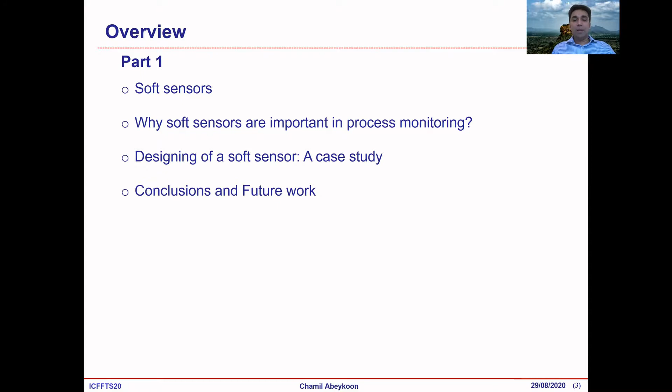For the second part, I would like to talk about fuzzy logic based control and designing a fuzzy logic based control, again with a case study briefly based on the polymer extrusion process, and some conclusions of that work.

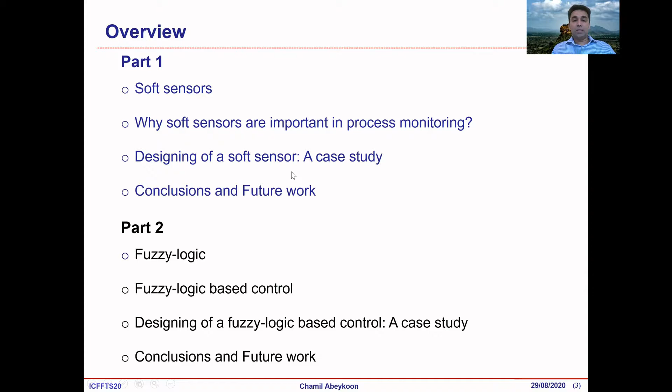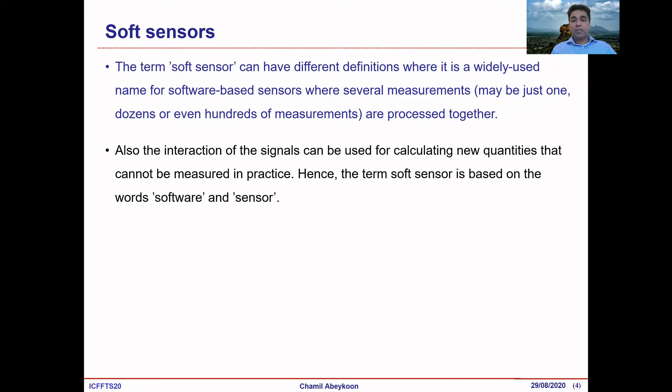A soft sensor can have a number of different meanings, but it mostly relates to a software-based sensor. These sensors could be based on one measurement, or maybe a dozen measurements, or even hundreds of measurements, which we process together. The idea is to process these signals and calculate a new quantity or parameter which cannot normally be measured in practice. Hence the term soft sensor, based on the words 'software' and 'sensor', shortened to 'soft sensor'.

If you ask me to define the term soft sensor, here is the definition I have written: a soft sensor is a technique of estimating process parameters in various applications when a hardware sensor is unavailable or unsuitable for making direct measurements.

So soft sensors are really important to measure or predict process parameters when we cannot use physical sensors due to constraints in the process or environment, or when there is no physical sensor available for a parameter measurement. In such cases, we can use a soft sensor.

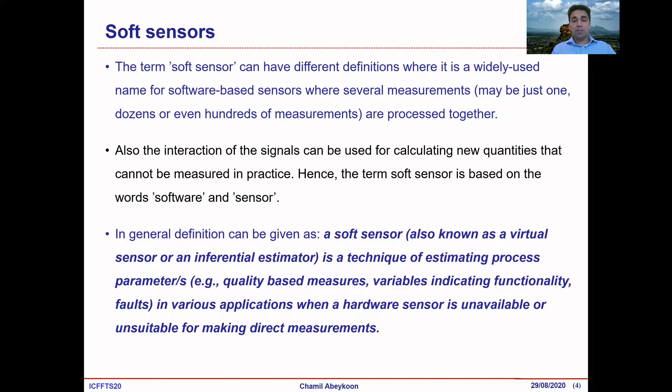Sometimes you will find this known as a virtual sensor, hybrid sensor, or inferential sensor. All of these terms refer to software-based sensors.

So most of these inferential sensors are used in real-time process monitoring, modeling and control, and also sometimes in fault detection and estimation, the process diagnostics. So mostly in continuous processes which operate 24/7. So of course, these processes are running continuously.

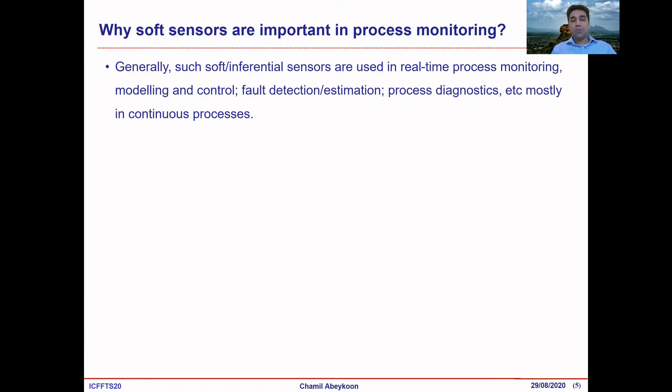So then it is very important to have as many measurements as you can in several locations to observe the process functionality, to observe the process quality, and therefore we need to have some advanced measurements. So then soft sensors can play an important role in these types of occasions, right? If you look at the current industry, soft sensors are already being used. So that is the important thing.

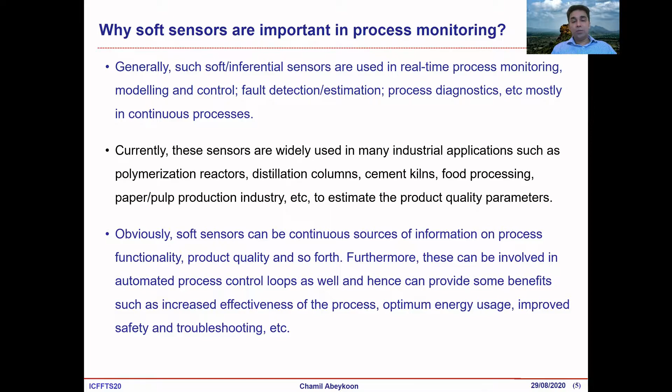This is mainly being used in the chemical industry, polymerization reactors, distillation columns, cement kilns, in the food processing industry and paper pulp production industry, mainly to estimate product quality parameters. Okay, and then these soft sensors can be a continuous source of information for process functionality or product quality, as I mentioned before. And these can be used for process optimization and also for energy optimization and for several other purposes as well. And also, if we can have more measurements which are really useful, then this can be helpful for process control purposes as well.

So in general, if you look at soft sensors, we can categorize them into two types. Model-driven is one type. These are based on first principle models. I hope you know how to develop first principle models based on physics. And the other type of soft sensors could be data-driven. These are mainly based on actual data measured from the processing plants. So you can collect the information in offline modeling or maybe inline modeling, or we call online modeling. So we can use data-driven soft sensors based on the actual data collected from a plant.

Okay, so of these two types, model-driven soft sensors, which are based on first principle models, are mostly used in steady state processes to analyze the physical and chemical background of the process. While the data-driven soft sensors can represent the process dynamics quite well compared to model-driven soft sensors, because data-driven soft sensors are based on real process data instead of physical or first principle models. So therefore, data-driven soft sensors are popular, but it is quite challenging to develop them sometimes.

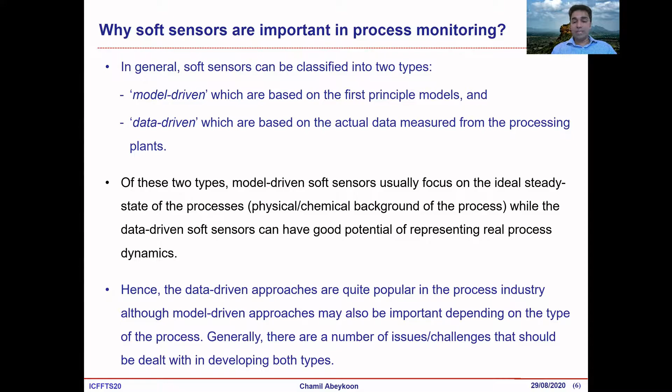Okay, and there are a number of challenges, issues or limitations attached to the development of soft sensors of both types, model-driven or data-driven. So there could be some limitations in developing these soft sensors or virtual sensors. Right. So in this talk I'm going to focus on data-driven soft sensors. I'm going to look briefly at how we can design a soft sensor. The design process can be classified into a few different stages.

So the first stage is the data collection process. Here I'm going to look at the required essential tasks, and also maybe optional tasks in developing a soft sensor. The first one is data collection. If you look at a data-driven soft sensor, we should have a very good set of data. So then we can use data acquisition devices and a set of sensors, and then process investigation procedures to collect a good set of data. When we are going to design system identification experiments to collect the data set, you should know which parameters you're going to predict, and therefore which sensors you should be using.

And here some things to be considered: the accuracy or the quality of sensing devices and data acquisition units. It is quite a well-known factor. You should have some idea about how quickly your process is changing. When you select a sensor, that sensor should be updating quickly enough to capture all the process dynamics. So therefore, selecting the sensors and also data acquisition devices should be compatible with the speed of your process. Otherwise, these devices might not be able to capture all the process dynamics fast enough. So the sensor that you're going to develop might not be able to represent your process properly.

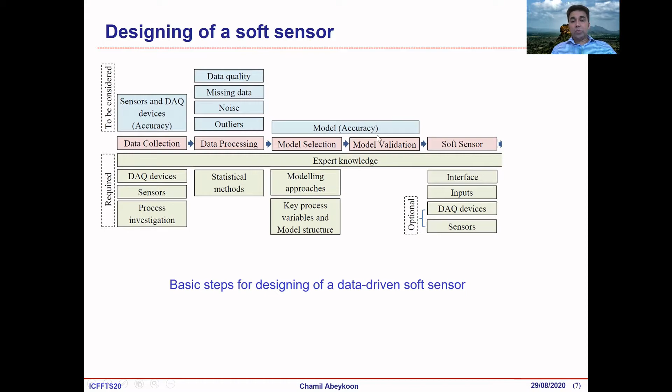So the model validation, or the model testing and training, should be done in proper ways. That is also important to make sure that your model is doing well. So once you have data collection, data processing, and then you develop the models and validate the model properly, then you can implement the soft sensor. So ideally, the soft sensor will have a set of inputs based on some real-time measurements from your process, and then we have the interface or the algorithm, your model, in a soft platform, and once you provide the input to the soft platform, it will predict the parameter that you need.

You can develop this model offline, or most probably if it is a continuous process, it would be better to develop online modeling. So then you provide the input to your model, and it automatically predicts the output based on the algorithm or the model that you have in the soft platform. So once you implement the soft sensor, it's important to think about the interface and inputs, and also the data acquisition devices and sensors that you're going to use. So those are important things to be considered.

And then one of the other important parameters is when you collect the data set, you should make sure to run your process within the whole operating envelope.

So if you don't run the process within your whole operating envelope, what will happen? Let's say you record the data of your process at the first stage between 0 to 50 RPM, but your process is normally running above 50 RPM, and you use a soft sensor to predict some parameter. When you run the process above 50 RPM, your soft sensor might not be able to predict the required parameter accurately enough, because you have not collected the data within that range.

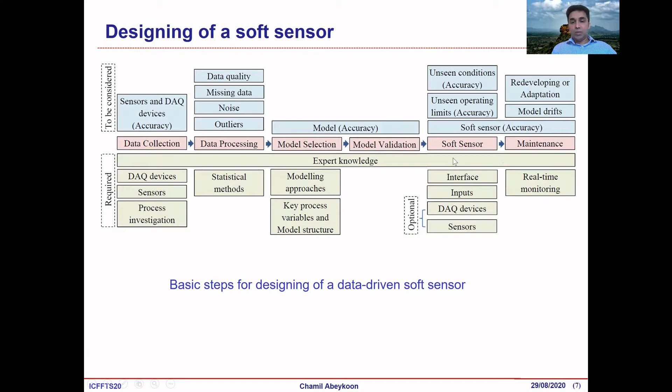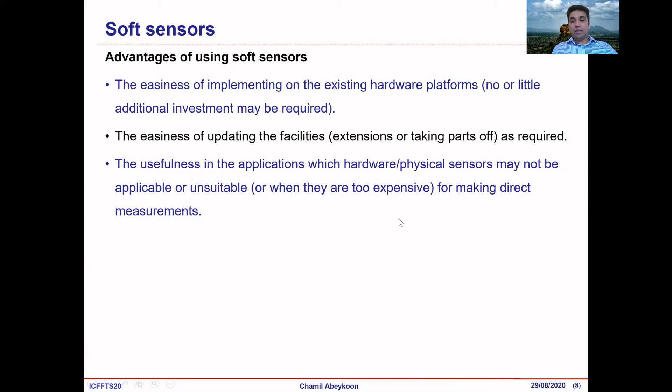So then the advantages: there are several advantages of using soft sensors. We can implement them using the existing hardware platforms, and it's easy to update because it's a soft platform, so you can update the model without any problem if you have new models developed. And, as I said, we can use them when hardware sensors are not suitable or not available.

And real-time estimations can be done without any time delays. Let's say you are taking measurements and your sensor is far away; it could introduce some delays between the interface or control panel and the sensor. But soft sensors can be implemented by considering those time delays. And possible ease and simplicity of maintenance, but I would say it could be complicated depending on your process and how complex it is.

Right, and also it could be low cost. Again, it's something you have to consider. Let's say you want to use a thermal imager to analyze some parameter; it could cost maybe $3,000, but you might design a soft sensor to get the same thing using some reasonably good sensors available in the market for $1,000. So it's your choice which one is more suitable.

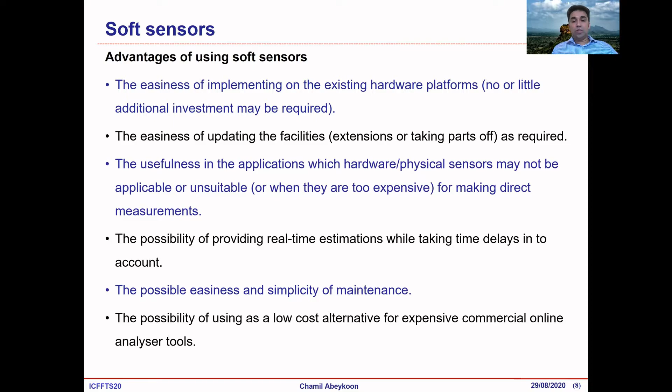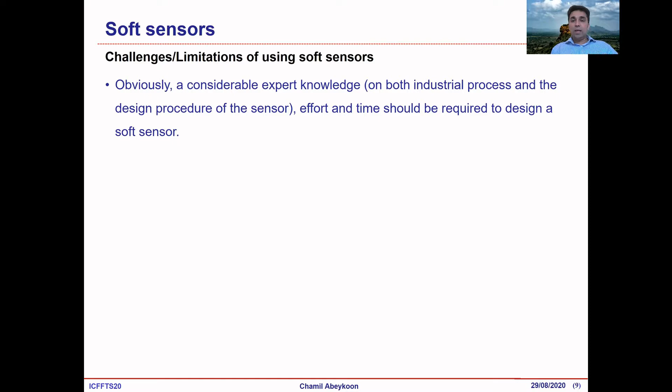And then challenges and limitations. Obviously, expert knowledge is one key thing. The person who is going to develop a soft sensor should have knowledge of the process itself. Let's say you're developing a soft sensor for a polymer extrusion process. That person should have a good idea about how the process works, what the parameters are, and what the possible instabilities are. At the same time, they should have good knowledge of data processing, modeling, and developing algorithms. So expert knowledge is really important in developing soft sensors.

Also, the performance of a soft sensor depends on the training and validation data sets, so the quality of the data is important. Sometimes it might be difficult to get a good set of data using available cheap sensors. And data-driven soft sensors might be specific to a given condition. For example, let's say you run the process for one particular die geometry and for a certain set of speeds.

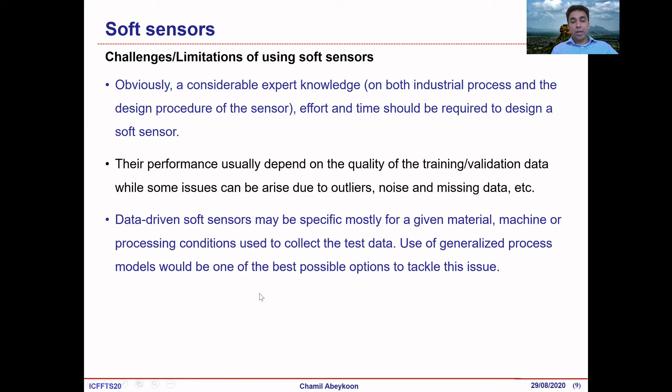So then if you develop a soft sensor based on that set of data, it could be good only within that range. If you run the process outside that range, your soft sensor might not capture those dynamics. So therefore, it is important to look at the whole operating window when you develop soft sensors. And the other thing, maybe one of the solutions would be to develop some generalized models to cover the overall processing behaviors if you can.

Right. So from here onward, I'm going to look at a brief case study of developing a die melt temperature profile predictive soft sensor for the polymer extrusion process. If you don't know the extruder, this is a basic arrangement and how it works. Here we feed in some solid polymers, and they are driven through by the extruder screw while absorbing the heat.

The heat can be provided externally, and also the heat can be generated internally via friction and viscous dissipation. So at the end, we should have a molten polymer which is thermally homogeneous. If this is a circular cross section, throughout the cross section we would like to have a certain temperature, let's say 200 degrees, and then this melt can be pressed into the die to get the desired shape.

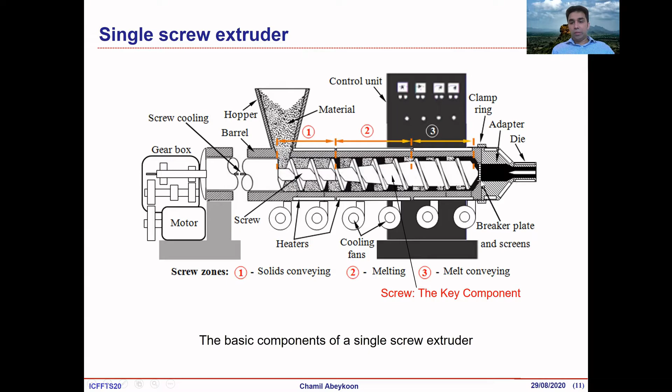If we don't get a high quality melt which is thermally homogeneous, then there could be problems in the product. I'm not going to discuss more about the extrusion process; we are going to look at the melt quality at this end. Then what is the motivation for this work? A while ago we were looking at the thermal efficiency and specific energy consumption of extrusion processes, and we realized the thermal fluctuations across the melt flow cross section matter. Let's say it's a 38 millimeter die.

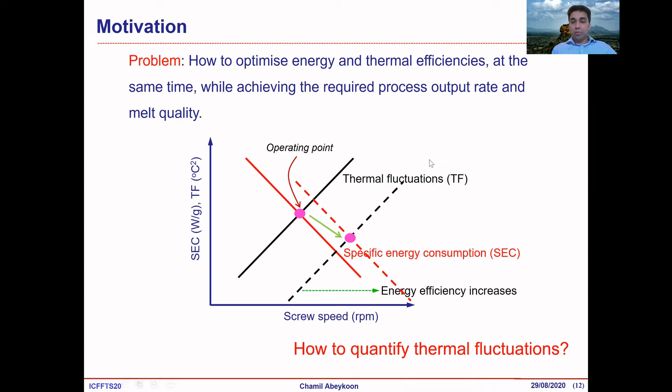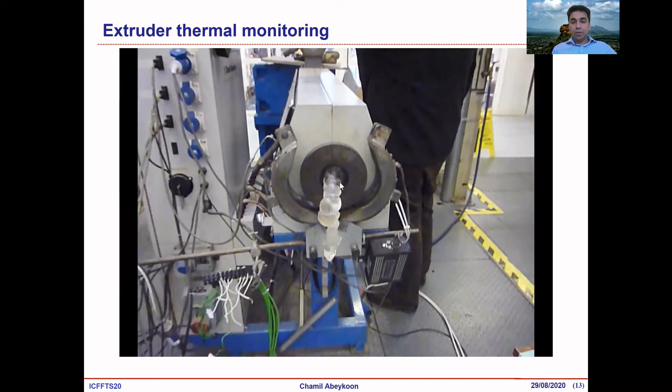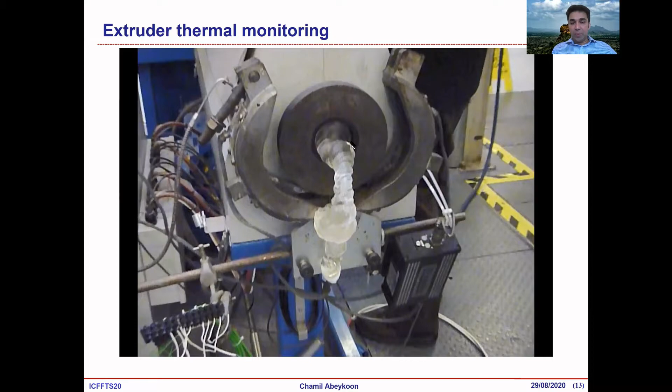If you look at the process here, I'll show you a short video. This is how you will find the output of an extruder. You can see it's a highly viscous melt. If you place a sensor across this to measure the temperature cross section, it's going to be really challenging. The sensor should be really robust, so it's not easy to make a measurement using a physical sensor across that output.

So this is the output of the extruder, and we wanted to check the temperature variation across this cross section. Those are the motivations. We wanted to develop a model to predict the temperature profile at this location. So what we did, we wanted to measure it experimentally, and then we checked the available sensors. I'll come to that in a minute.

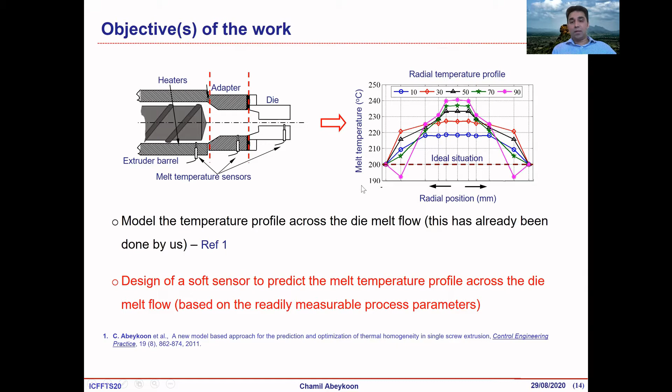So then we wanted to develop a model to predict this melt temperature profile, and by having that model, we wanted to develop a soft sensor. That is what our target was in this study. Ideally, if you set 200 degrees here, we need to have 200 degrees across the melt flow cross section, but we can't get that. This is actual results.

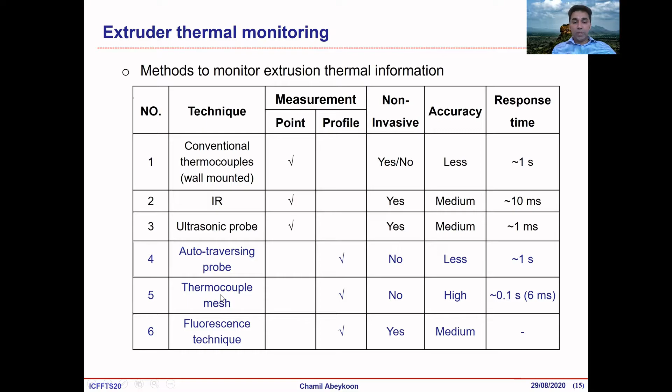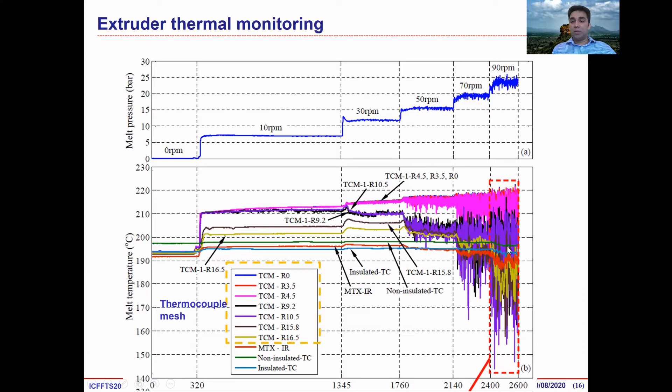The insulated thermocouple is the blue one. You could see it shows a really flat temperature profile, so it's not good enough. The non-insulated thermocouple is even worse maybe, the green one. They are indicating really stable melt temperature, but actual temperature fluctuations are really huge. These infrared sensors and wall-mounted thermocouples shown in green, red and blue are the most commonly used in industry. So the industry is getting stable signals, but actual thermal fluctuations are really huge, especially at high speeds.

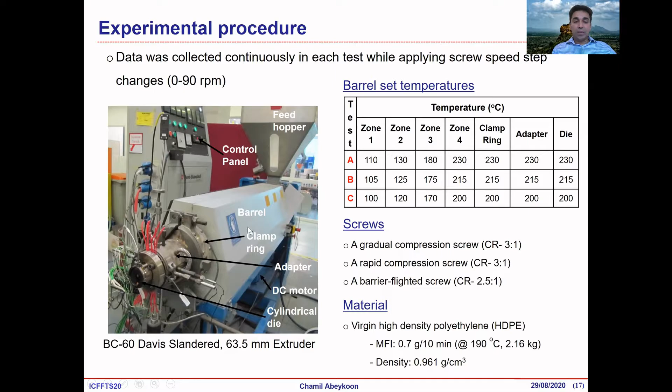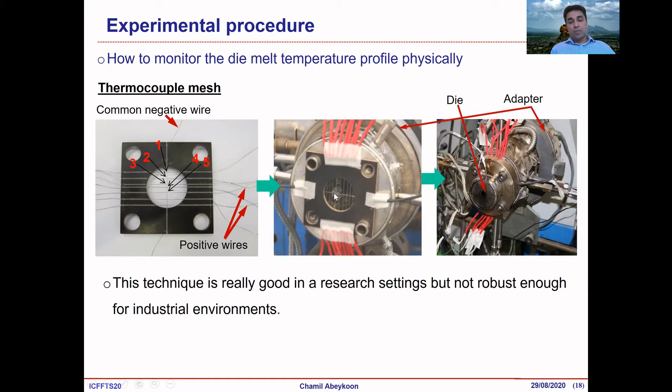But this is really fragile. You can see tiny wires here, so they can be easily broken, and it is disturbing the melt flow and also adds some shear heating effect. Therefore, this is not viable in industry.

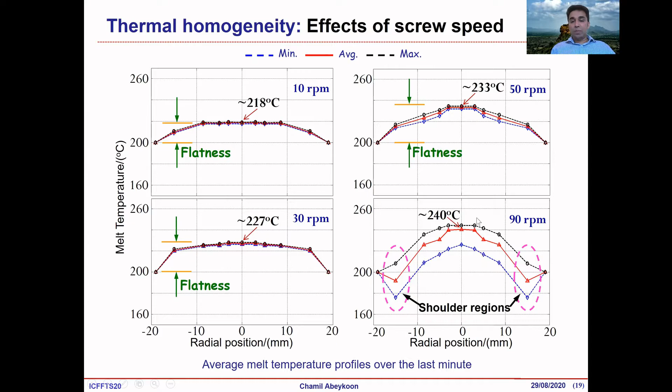So it's really complicated, the thermal behavior. So what we wanted to do is predict this, because it's not possible to measure in industry—we can't use a thermocouple mesh in industry. So we wanted to replace the thermocouple mesh sensor with a soft sensor.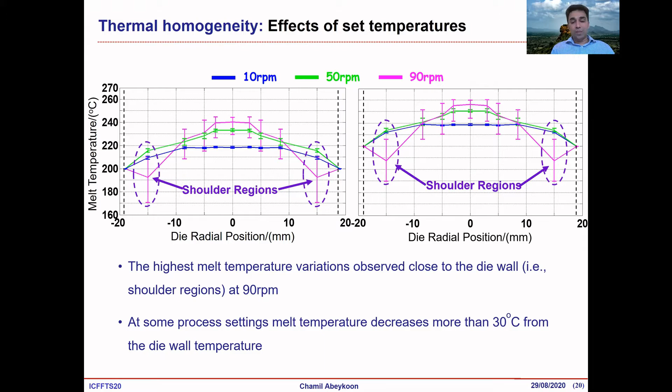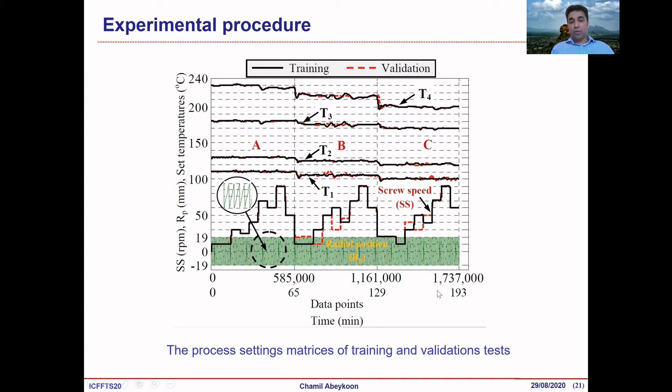So we planned some system identification experiments covering the whole range of the extruder, up to 0 to 90 RPM at a number of different temperature settings. This data set is more than 3 hours continuously. We collected the training and testing data sets, and then trained a model.

So then we selected the model structure, which I mentioned in the previous slides. We recognized that the key parameters which decide the melt temperature of the extrusion process are the screw speed, the radial position across the die, and the set temperatures of the barrel. So these are the key parameters.

Apart from these parameters, we have other material parameters like density and viscosity. But at this stage, these are the main parameters—we did not add these material parameters. This can be added later.

So this is the structure of the model to predict the melt temperature profile that we decided at the first stage: melt temperature across different radial locations as a function of screw speed, radial position, and set temperatures of the barrel. We consider all of the die and all the zones to be at the same temperature—that is what we did in the experiments as well.

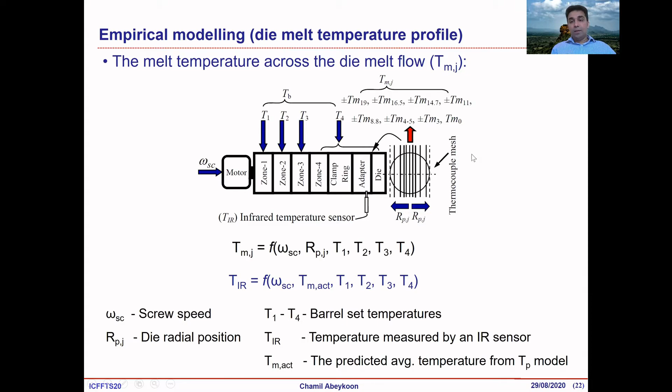We use the same temperature across all of these zones. Once we developed this structure, we used a linear-in-the-parameters modeling structure or technique to develop the models. I'm not going to discuss much on this—you can find more information in these publications, which we have already published about these techniques. This is a good technique to develop polynomial models, and then we developed the models.

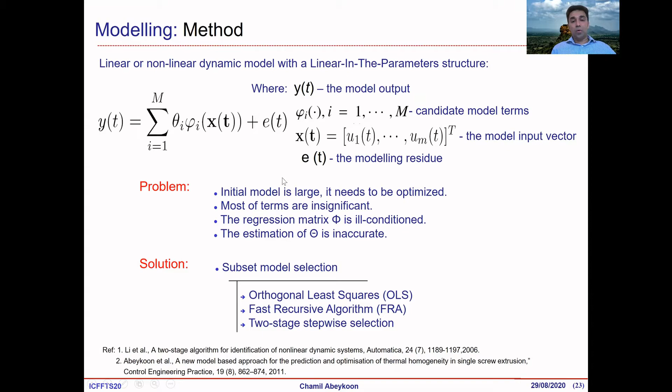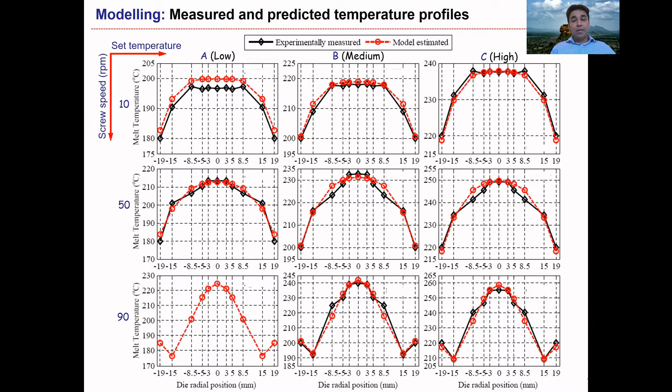These are the kind of models that we develop. The TP model is the main model that we're going to use in the soft sensor to predict the melt temperature profile. The TIR model is a model to predict the temperature measured by an infrared sensor. I'll explain why we need this model as well.

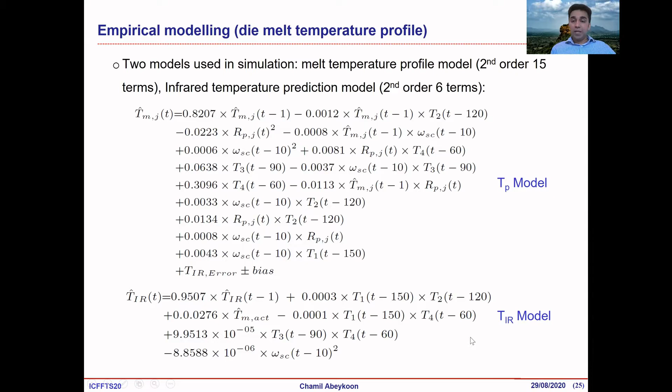So in the soft sensor, we needed two main models: the TP model and the TIR model. The TP model predicts the melt temperature at different locations, and the TIR model predicts the melt temperature measured by an infrared sensor—we're going to use this as a feedback model. So this is the structure now: in our soft sensor, this is the extruder, and we have process inputs that we're going to measure, which are the inputs to our models.

Screw speed, set temperatures, and then here in the extruder we just use an infrared sensor to make actual measurements as well at the end of the die.

Okay, so now we just use our TP model to predict the melt temperature profile. Once we have a melt temperature profile across the die melt flow, we can get the average melt temperature profile.

So we just feed that into the TIR model. The TIR model predicts the infrared temperature measurement that we make here as well. So what we are trying to do now is compare actual infrared measurements with predicted infrared measurements, which is based on the TP model. Then we can get the error between measured and estimated.

So if there's no error, that means we can assume the TP model is doing well and the measurement is really good. If there's an error between TIR measured and TIR predicted, that error can feed back to correct the prediction of the temperature prediction model.

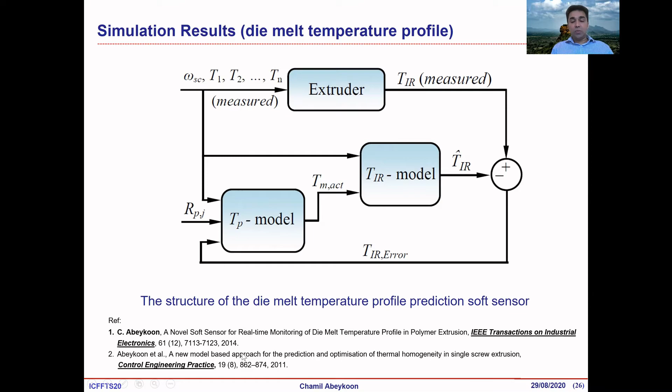So then you can find more information in some of our publications in IEEE Transactions on Industrial Electronics and Control Engineering Practice. This one is for the temperature profile prediction model, and this one is for the soft sensor.

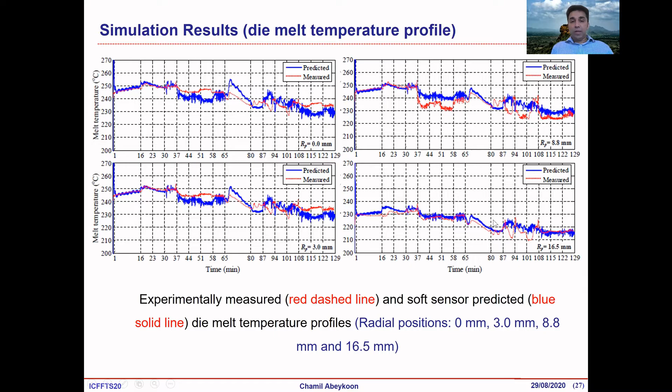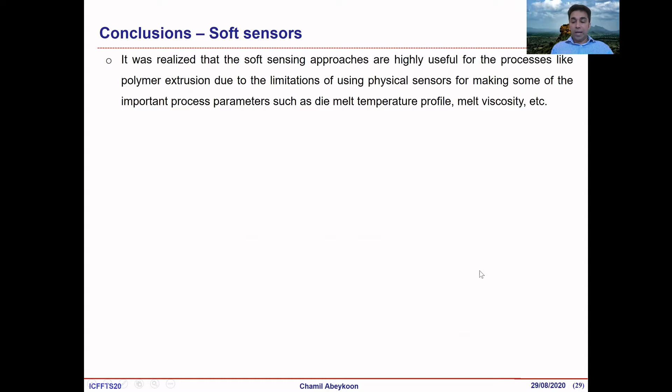Based on that, this is the first soft sensing approach proposed for die melt temperature profile prediction in polymer extrusion. It is showing very good results at both the simulation and testing stages.

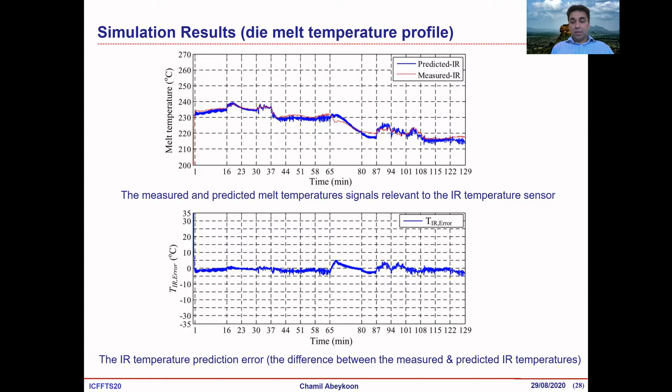So then what we want to do now? This is a very good sensor, and over a 129 minute period, it gave less than plus or minus 5 degrees for full scale reading. That's quite pretty good, and this sensor is really quite good if we can develop it further.

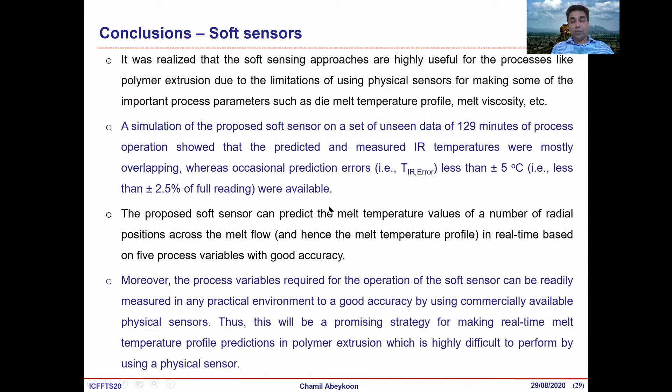Into the industrial level. So for future works, what we are going to look at here is implementing this soft sensor as a plug and play device.

So then once we have the inputs measured, more importantly, these inputs are really readily measurable parameters. Screw speed and set temperatures are the key parameters that you can measure without any problem, without disturbing the process in industry. Therefore, we can use those parameters and input them into our model.

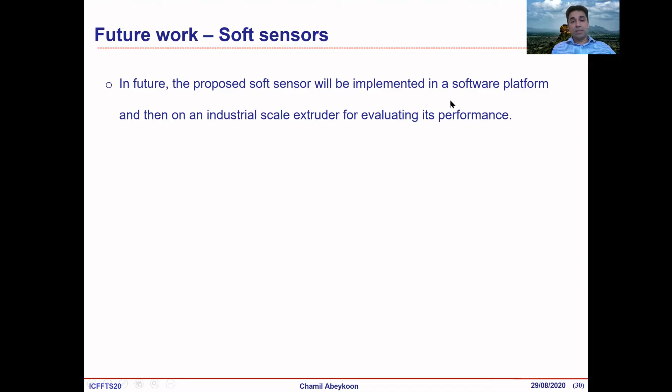So then it can automatically or easily predict the melt temperature profile across the melt flow, although we cannot measure it using a physical sensor. So our next target is to implement this soft sensor as a plug and play device.

And also, we wanted to extend this soft sensing technique not only to polymer extrusion but also to other polymer processes as well. Okay, so that is all about the soft sensing task that I want to discuss.

So therefore, soft sensing is really important, especially since the extrusion process is a black box. It's difficult to place sensors inside the flow without disturbing the flow. That is why soft sensors are important, and that is why we wanted to try this.

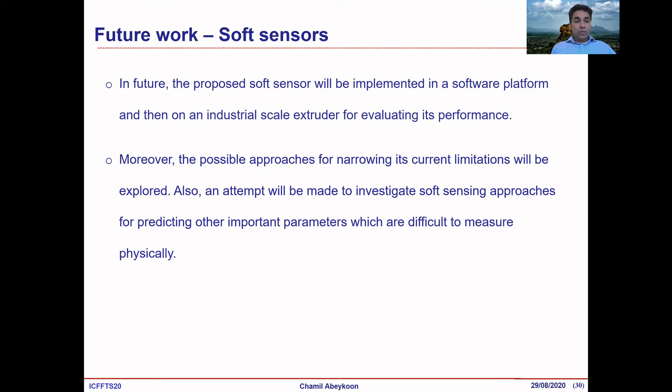So then now we have a sensor to predict the melt temperature profile, although we cannot use an actual sensor to measure the melt temperature profile across the die melt output. With that, I would like to move on to the fuzzy logic based control without wasting much time.

So here I'm going to give a very brief idea about Fuzzy logic based control and how we can use this in industrial process control. This has been used for a long time actually. Fuzzy logic was proposed in the 1960s by Professor L.A. Zadeh, then emerged in the 1970s, and now it is being used everywhere. It's a really popular technique in process control.

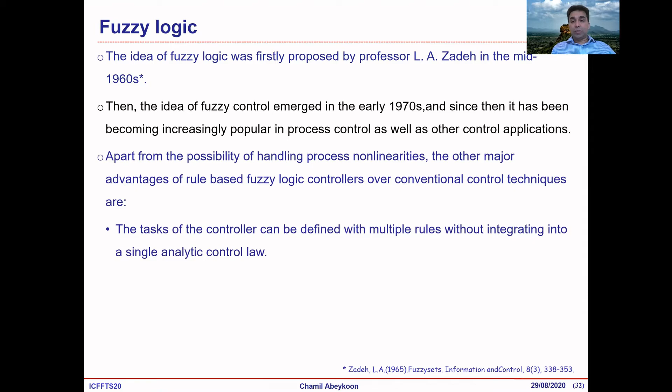So why is Fuzzy logic important compared to conventional techniques? We can implement a controller with multiple rules without integrating into a single analytical law. That is important. We can also develop simple linguistic rules, although these may be complicated again based on the process, with basic knowledge. We don't need to define exact numerical boundaries with Fuzzy logic controllers, so that is also a good thing. They can work based on qualitative information, and possibly have low installation cost as well.

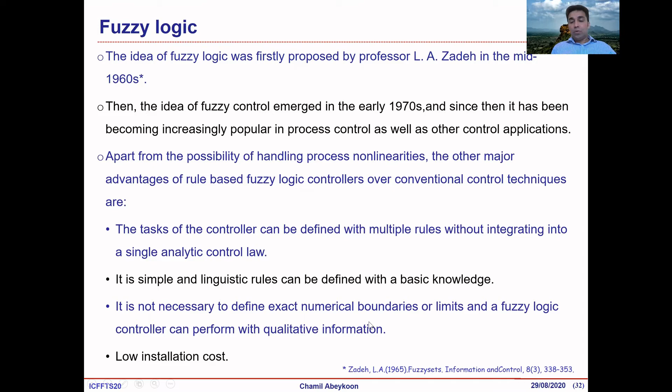These are fuzzy rules. You have to develop these rules based on your process. These are the identities you're going to use to represent the process, so these rules could be different from process to process. You have to develop them based on knowledge of the process. We sometimes call them if-then linguistic rules.

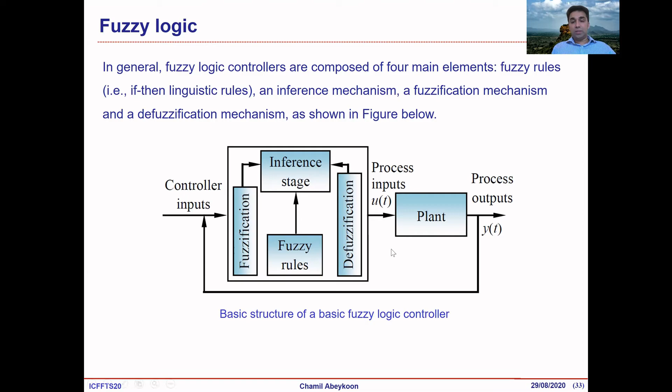The inference mechanism is one of the most important tasks in Fuzzy logic control. Once we have the rule base, we have three major inference methods available in the literature: the Mamdani method, the Sugeno method, and the Tsukamoto method. Of these three, the first two are quite popular, and there are publications where you can find information related to these technologies. In our case, we prefer using the Mamdani method, which is the most commonly used method in practice.

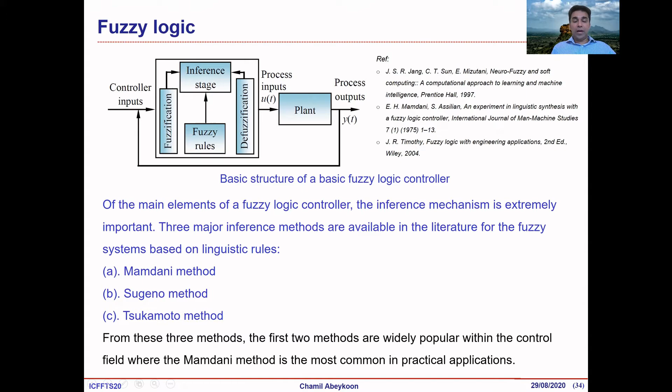Now, if you look at the challenges for Fuzzy logic control - as I said, when you develop especially the rule base, you should have in-depth knowledge related to the process. You have to define the rule base exactly to cover every possible scenario of your processing envelope. It is not certain that the controller can cover all situations due to disturbances, parameter variations, or noise. So it's a challenging task to define your rule base to cover all of these possible scenarios.

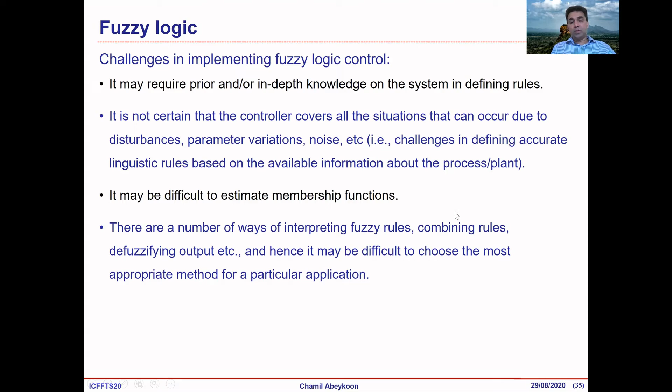It might also be difficult to estimate the membership functions - I hope you have some idea about those things. There are a number of ways of interpreting fuzzy rules, combining rules, and defuzzifying outputs, so it might be difficult to decide which method is most suitable for a given application. The shape of the membership functions is also difficult to decide, as there are many possible options. Once you have experience, you know, for this type of process or application, this is the most suitable type of shape. So that's about Fuzzy logic if you don't know the process.

Here, I would also like to briefly go into a case study.

So we recently proposed developing fuzzy logic based control for polymer extrusion. I'll just briefly discuss the extrusion process. If you look at the process control in a typical single screw extruder or twin screw extruder, the main extrusion control is based on traditional PID controllers. What they are doing is controlling the screw speed at a set value and also the set temperatures at a set value.

So that is the main control ability the current industry has for extrusion processes. These PID controllers keep an eye on the set values of screw speed and the set temperatures of the barrel and die. Those are the actual control. They are not looking at any of the process parameters or melt quality parameters to make the control decisions.

If you set up a screw speed at a certain value, the controller will look at whether the screw speed is at that value or deviating. If it is deviating, the PID kicks in and gets it back to the normal value. But the controller doesn't know what is going to happen to the output or the melt; there is no indication. It is not intelligent.

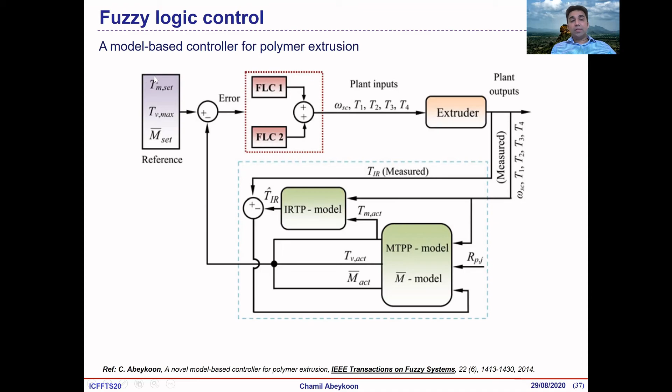So this is the soft sensor, and we integrate it with fuzzy logic controllers to define a fuzzy logic based control system that manipulates screw speed and set temperatures to maintain the process within the reference range. For our case, we defined 30 fuzzy rules, and we used the Mamdani inference method as the inference method.

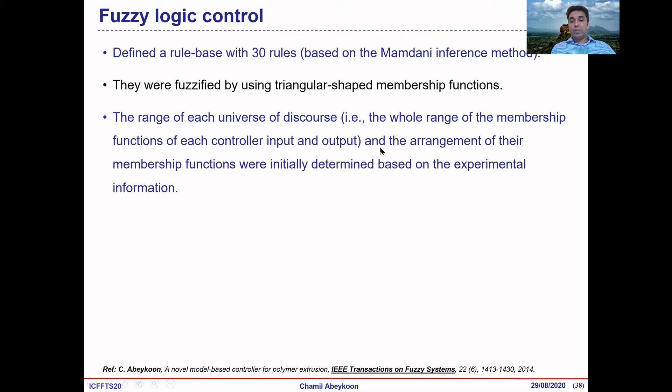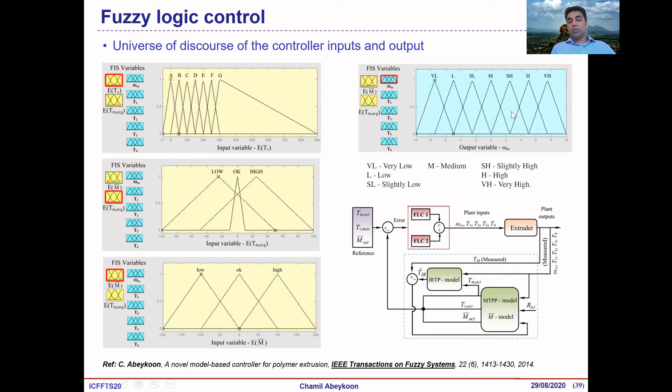And you can see triangular shape membership functions, and these are for melt temperature, average melt temperature. And then this is for the input variable, the process output or the mass throughput of the process. And then as the output, we're trying to control the screw speed to maintain the process within the required limits.

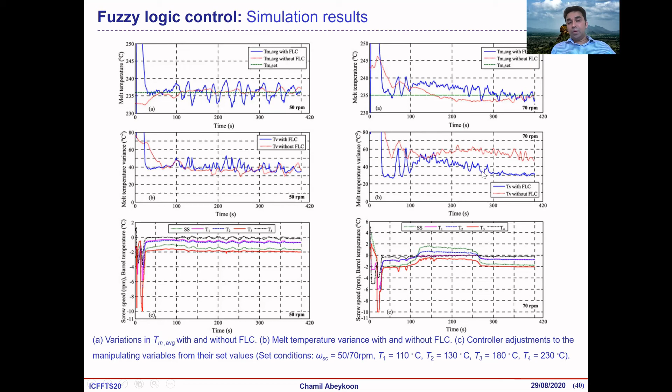Okay, so this is the actual variation. This is the method without fuzzy logic, and this is with the fuzzy logic controller. This is 50 RPM, this is 70 RPM. And then after that, we introduced some disturbances to the process. Here we introduced a 20 RPM disturbance to the input, the screw speed, and the controller can respond to that. And when we remove the disturbance, it is trying to get back to the normal operating conditions. So this is with a 20 RPM step change.

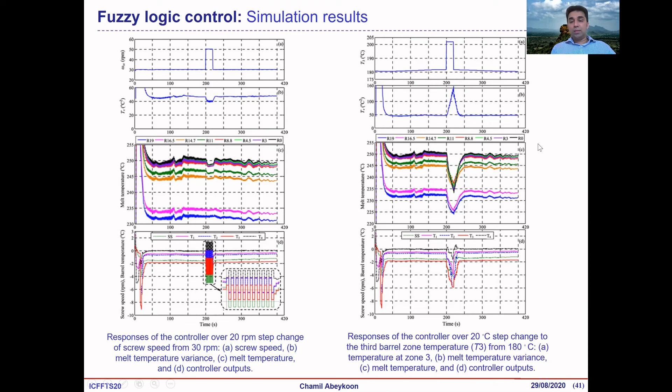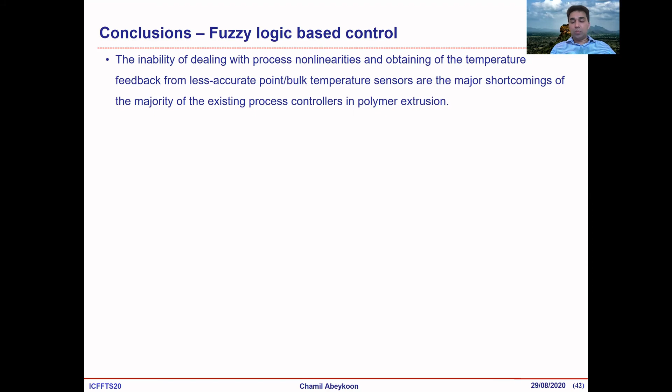And here we introduce a disturbance by introducing a step change to the third barrel set temperature, and still the process comes back to normal operation without becoming unstable. Okay, so with that, we can recognize that as fuzzy logic is being used for several other processes, we can introduce fuzzy logic based control for the polymer extrusion process as well. So this is really recommended.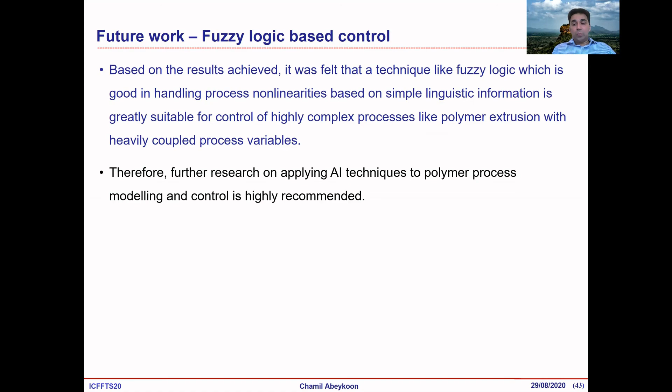And also fuzzy logic based control is heavily used nowadays in industry, but for some processes, we don't use this at all. They are not developed with the technology, for example, polymer extrusion that I discussed today. So using these techniques is really important to optimize the processes and save energy, to be compatible with the circular economy concept, to tackle issues like global warming, and to save the planet by reducing the carbon footprint. So that's all of my talk today.